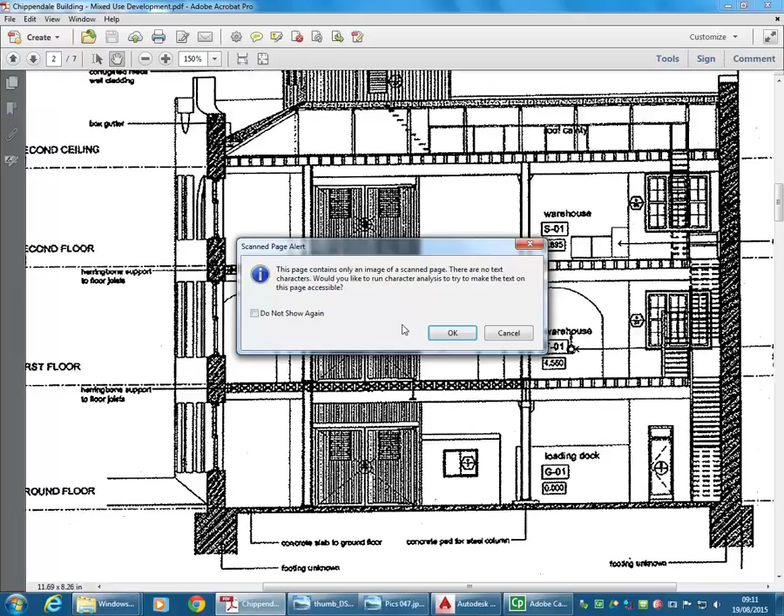Sorry? Yeah, if you want to, yeah. So, yep.

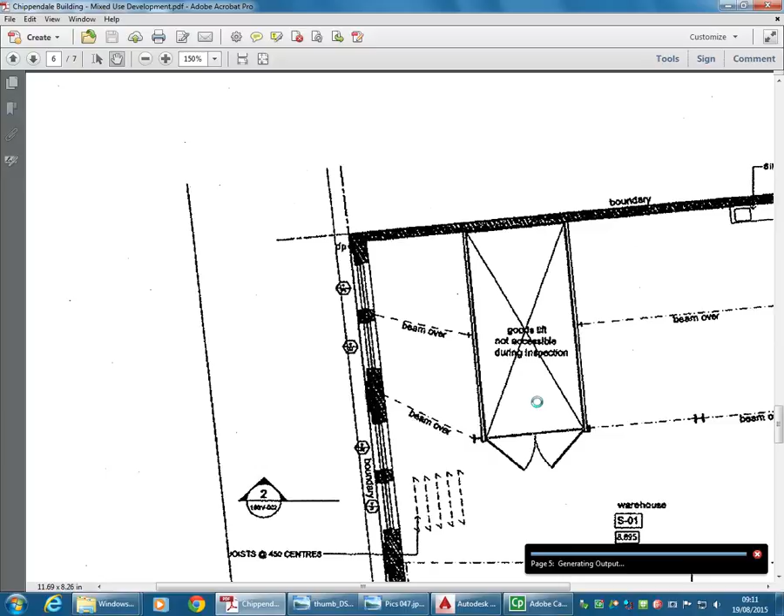Sorry, it's just jumping pages. I shouldn't have clicked OK to that dialog box, but it's just going to make things run faster and hopefully look better. Okay, so just going to rotate that back again. Oh, now it's crashed. Brilliant. Okay.

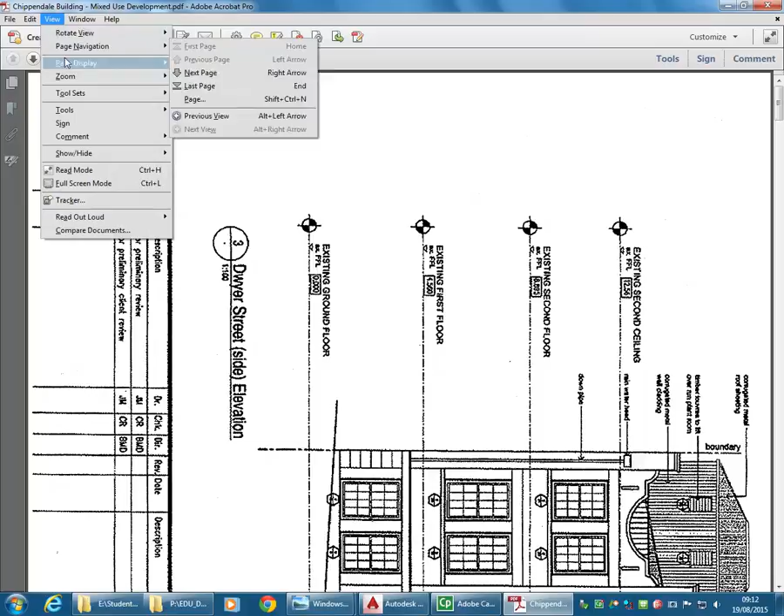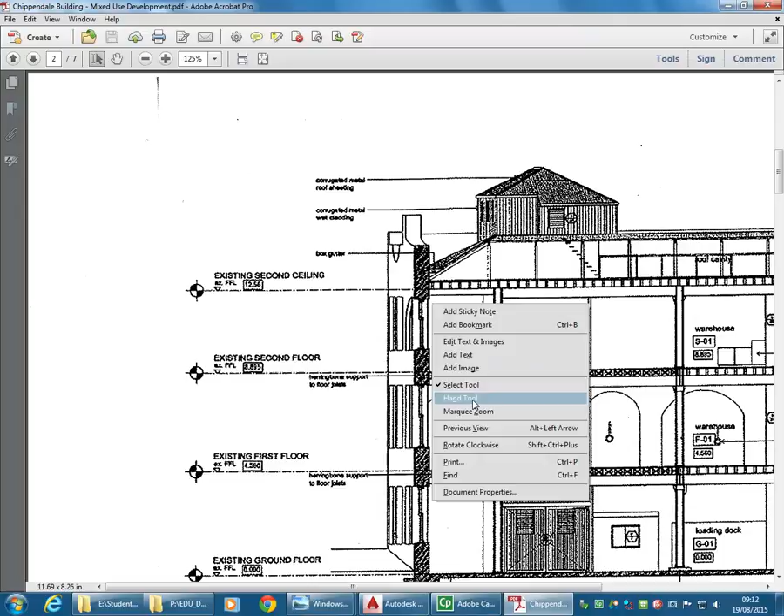Okay, so again, just looking at that section, the other main feature is the columns and the beams. So the columns and the beams support those joists, and so we need to add those elements to the section before really then proceeding to the reflected ceiling plan.

So I might even do the joist in the reflected ceiling plan before maybe completing them on the section, but definitely want to put in the columns and the beams before going too far with those things.

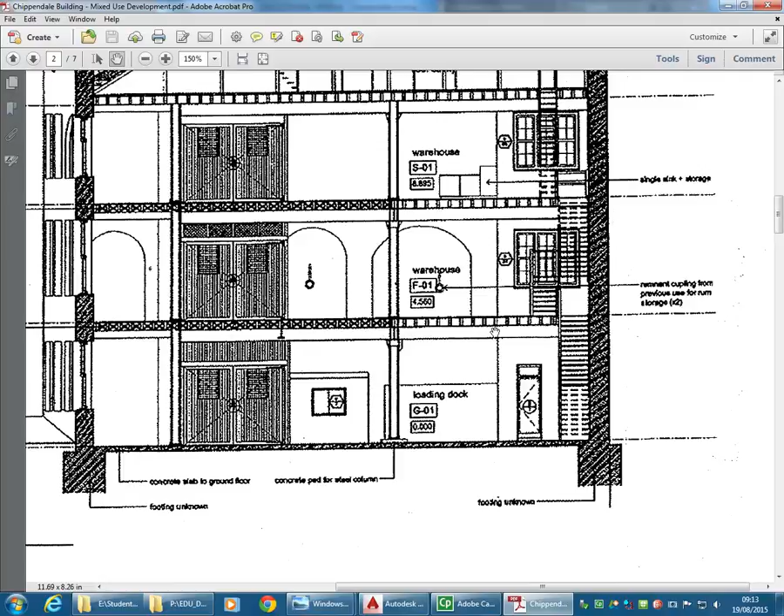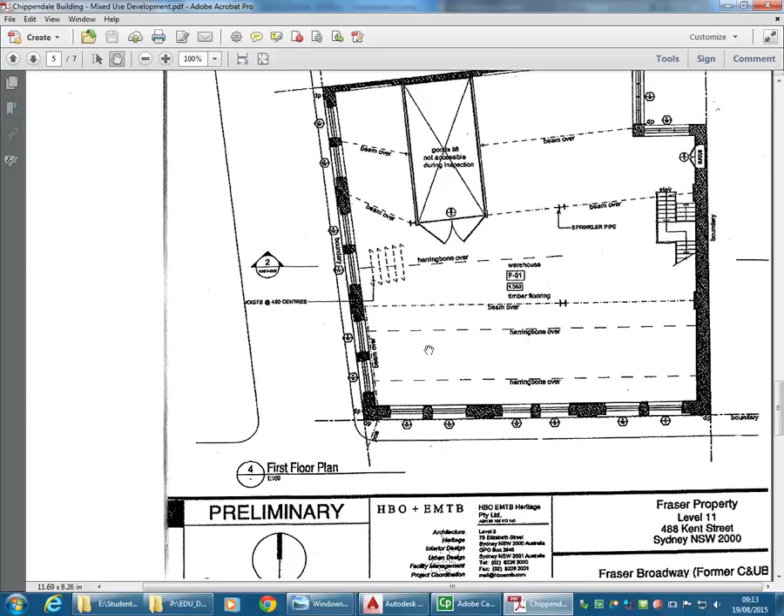And so the joists, I think, are not specified here. So by eye they look like they're about 200 or maybe 250 by 50. I'll just see on one of the other drawings if they're noted. Has anyone seen if there's a note for the joist size on any of the drawings? So it just says joist at 450 centres, but I couldn't see a note on the size anywhere. So again, we can just assume they're 200 by 50, I think.

And then you have the floor lining, so the floorboards above that, and so then working down from the floor level that we're using as a baseline, can assume, well, let's just make it a round number, 20 mil for the floor thickness. So I'm just going to offset 20 mil from that line there.

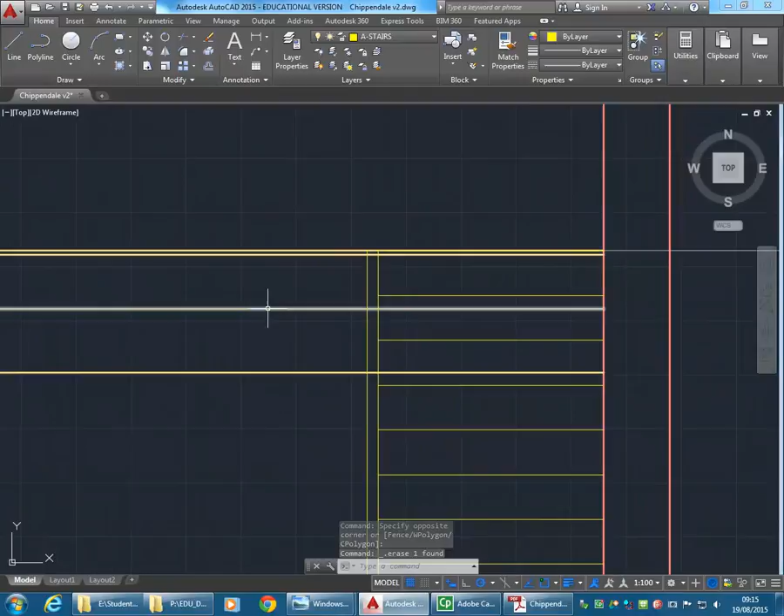And then again offset 200 this time for the floor joists, and we can see there that's really not maybe enough, because that leaves, let's just measure that distance, .345. They're looking more even than that, so maybe let's make it instead 250 joist. So I'll offset another 50 mil from that line. Split the original, so I've got there a gap, and that looks more like the section.

And so then we've got the beams underneath. And so now going back to the floor plan, I'm going to make a layer for the columns when they're, sorry, the beams when they're cut, but actually we'll do that later.

So we've got the structural columns layout, which you can use for the columns in elevation as well. So I'm just going to draw from the columns that we've already got, and actually while I'm at that, can check the orientation. Yeah, I think that's okay. Oops, so we've got it right when we place them.

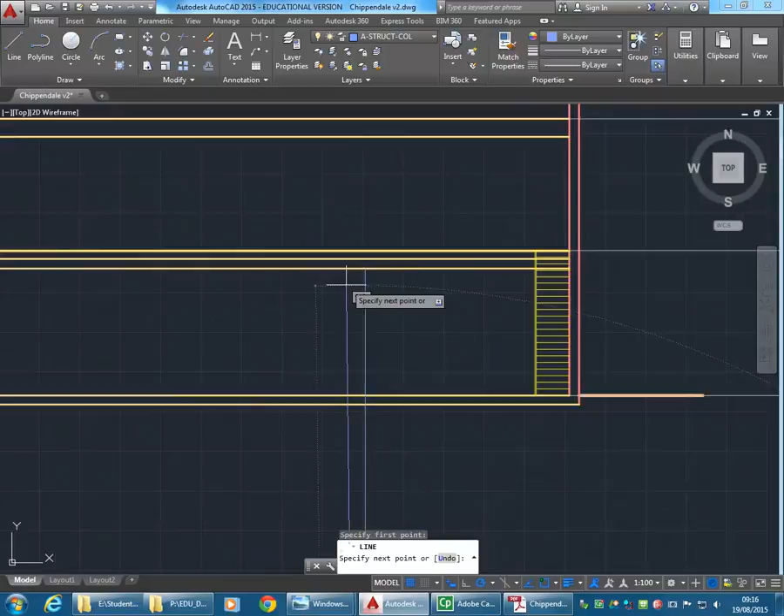And so again, just projecting lines from each edge that you'll see on the column. So you could even go as far as drawing the inner lines. And so notice I'm just making it perpendicular to the bottom edge of the beam for now. It will continue through to the joists. I'll have to look at the connection before working that out properly.

And there may even be another beam that projects across from here that isn't shown in the plan. Yeah, so there is. So we've got a beam here that comes towards us that we'll need to show in section as well, and that can be added to the plan later as well. So again, just copy that line across, so that's drawing it again.

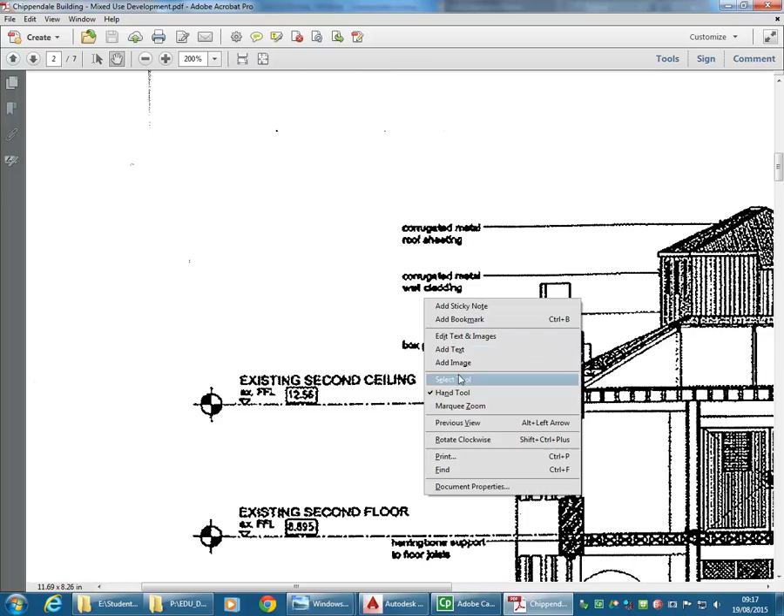Okay, so looking more closely at that drawing and then the photos as well. You can see these are actually different, so it really doesn't need to be perfect as long as you draw some sort of support there. It's not actually bracing is what I was going to say, but I forget the structural terms sometimes. So there are terms for all of these different steel structural elements.

Right, so we can just assume a size for that. So I'm going to say it's maybe 100 by 250 or something. Maybe, yeah. Well, if that's 3, yeah. So maybe 100 by 150 even or something. 150 by 80 maybe, even something like that. We'll see how it looks. So we'll do.

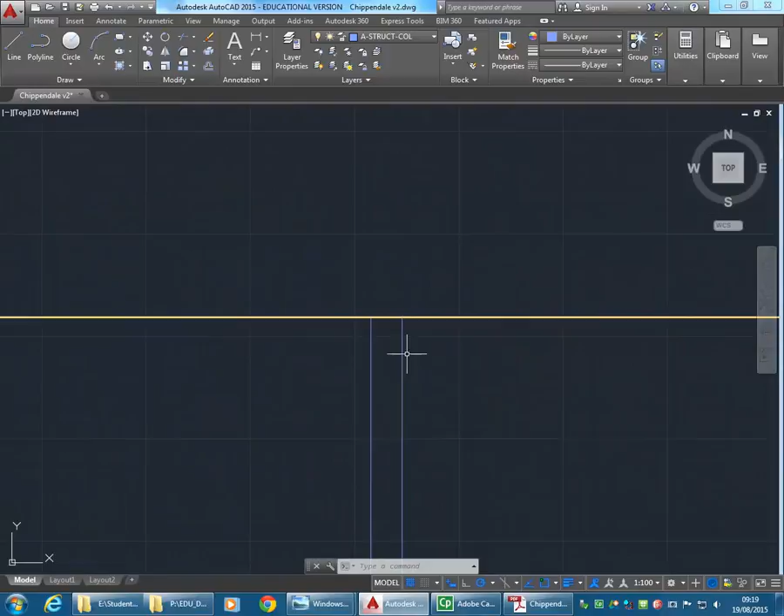Here you can see the thickness of the UB, and I'm just going to keep that. I don't remember what it was, 15 mil. So I'm just going to offset 15 for each of those lines, and then offset 100,

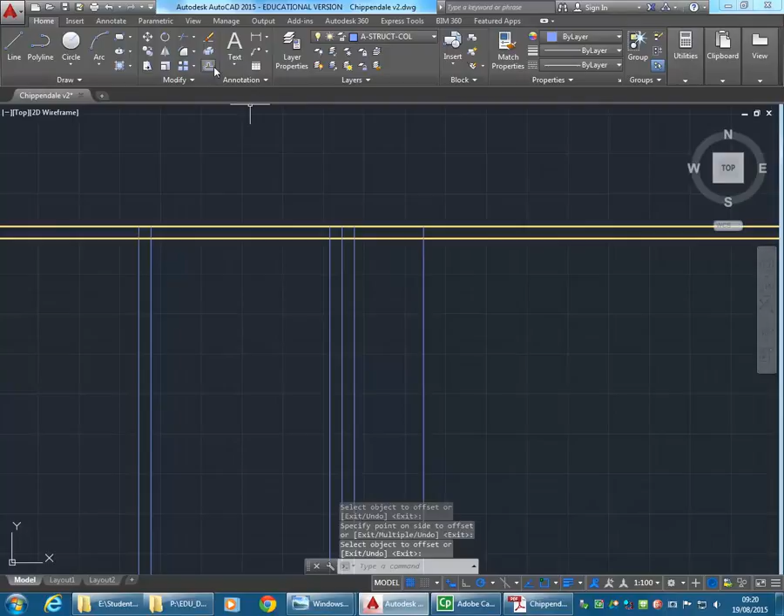and then 200, and then using fillet you can join all those lines together. And then trim.

So all those lines can just go onto the structural columns layer, and then a diagonal would be plenty.

You could, if you really want to, make a block for that little part, but I'm going to make a block for the whole column, and that should be enough, I think.

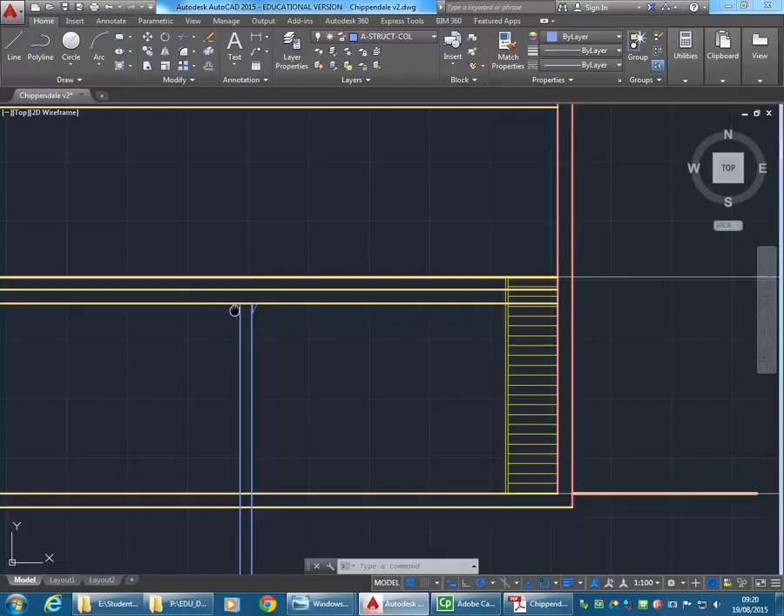So I've got one side drawn, and then the other side would just be the same. A good trick there is to draw a line between the two sides of the column. I'm just using the inner edge there to keep it simple. So I've drawn a line there, which should give me a midpoint in the middle of the column.

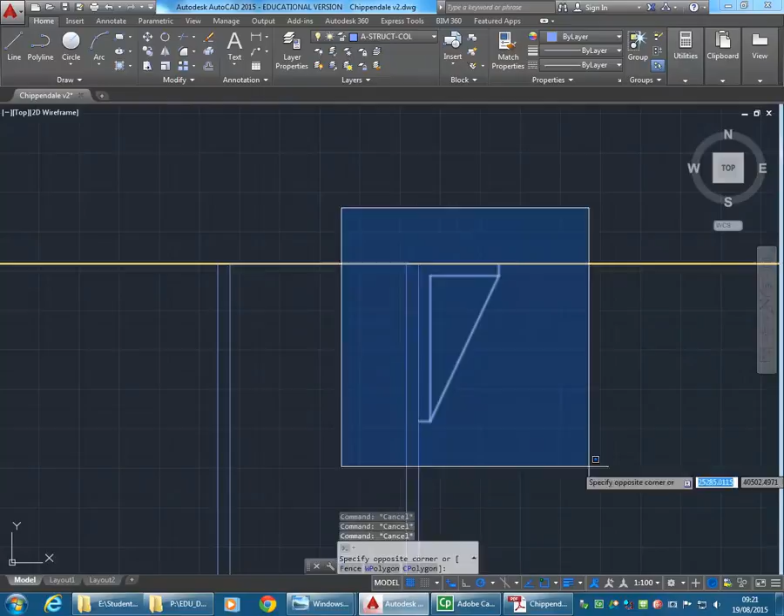Exactly, so I'm just selecting left to right. That's a window selection, which will only select the things inside. And then with mirror, I can snap to the midpoint of that line I've just drawn, take it down and make sure it's a vertical line.

Enter to keep the original. So you're going to make a block for that whole thing so you can just repeat it. Exactly, exactly, yeah.

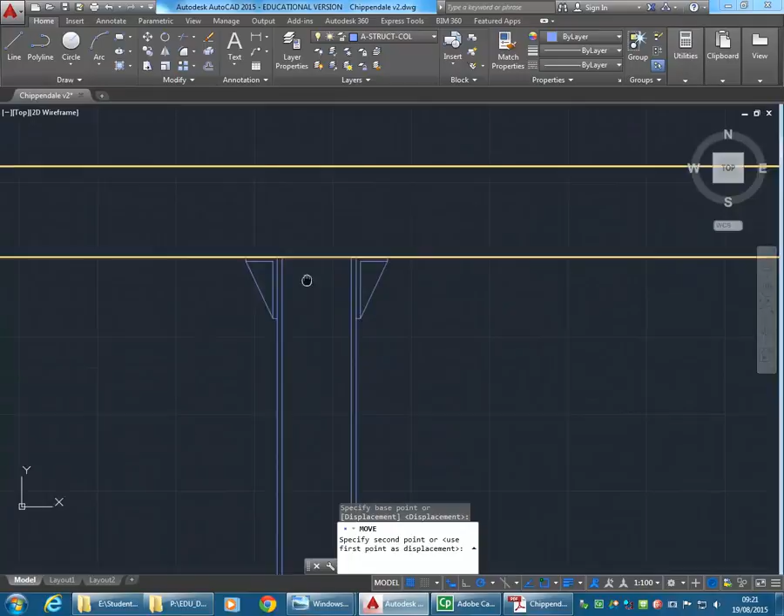So I might move that line down just to remind me that it's there, and it could come in handy when I need to mirror other things, but I'll delete it in the end.

And then, so we've got the plinth, the support of the, or the footing of the column there, which we don't see in that photo, so I'll just finish off with this block piece that is obviously different to the one you can see there.

So we've got just a rectangular piece that sits over the face, and I think even though it does probably project out, we can just say it's flush with the column when drawing it.

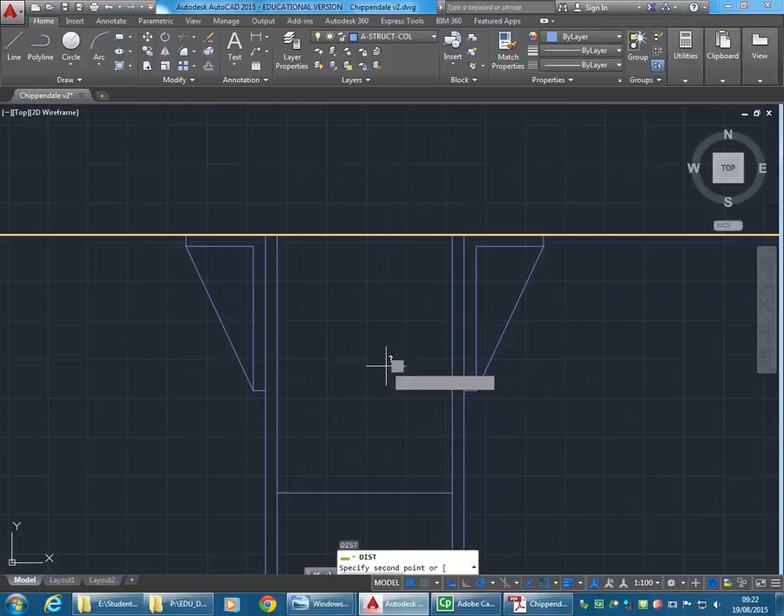I'm just going to measure so I can see roughly what the size is. So yeah, about 160, I think, maybe even 160 or so. So I'm going to offset 160 from the bottom of the beam down, and then what else do we see?

So that's, we're going to see the plate that sits under the beam. So we've got a beam coming towards us that we're going to see, and it's a good chance to draw a UB profile.

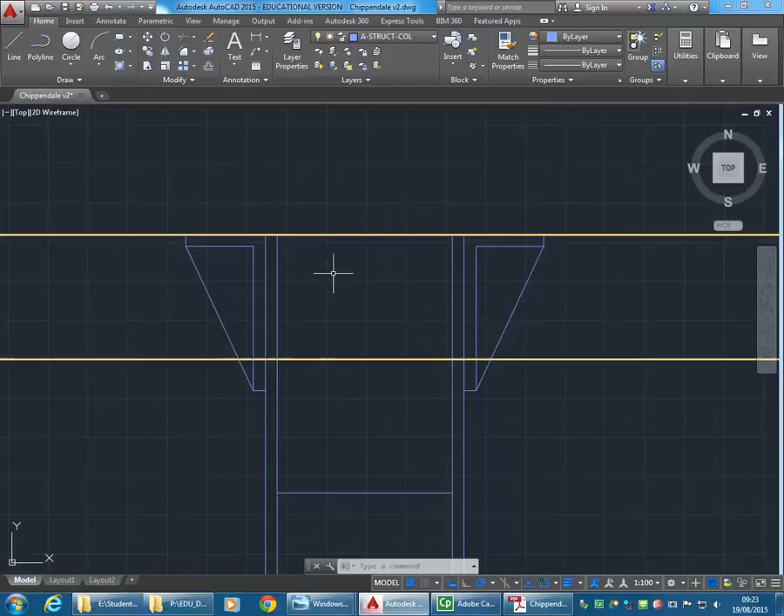UB. So this is a UC. The column is a universal column profile. So I've drawn that in plan.

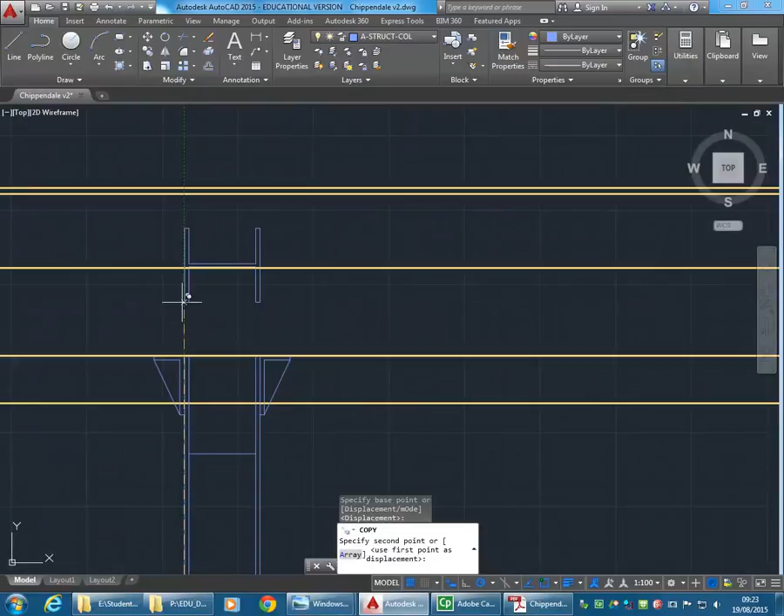Exactly. So I'm going to copy up that profile, since it's the same, just with different dimensions. So I've copied it up so that it's going to sit right above,

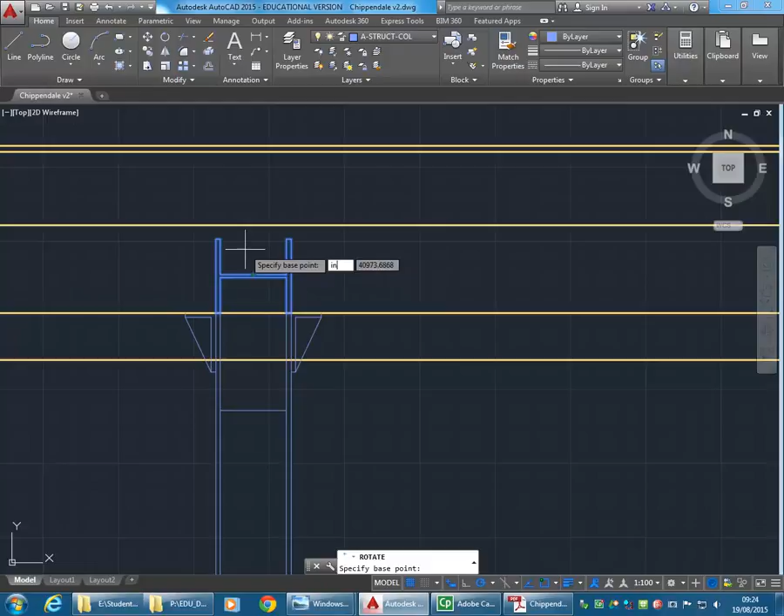and then using rotate, I can snap to the insertion base point. So just moving the cursor around, notice how it's trying to give me the midpoint. It's going to give me the insertion if I move around enough, but a good trick there is to type INS, enter, and then hover over the block, and it'll always snap to the insertion point.

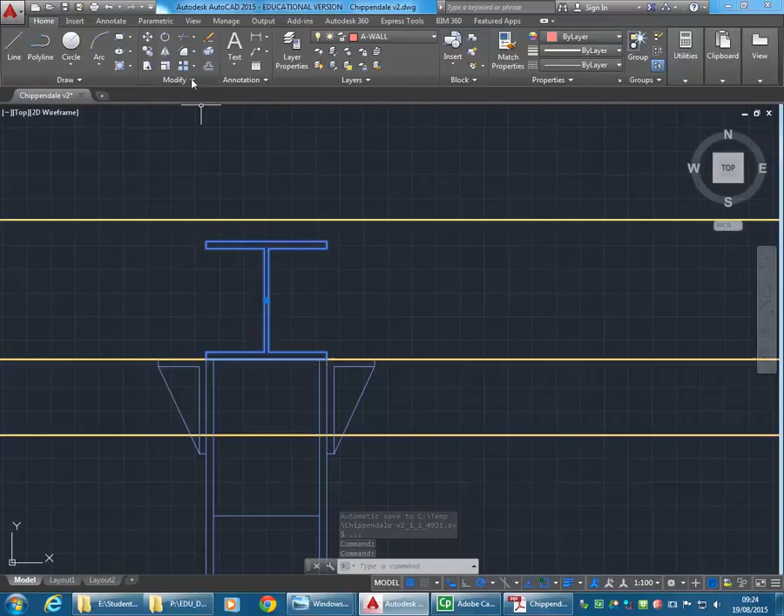And now I'm just going to make sure it's rotated so that it's vertical, and then can explode it. So if I select it, the really important thing to know about blocks is that you can always explode them. So the explode button you have there on the ribbon.

Does that mean just that block? Yeah, just that block, exactly, yeah. And so now if I stretch, this time I'm going to select right to left, which is a crossing window. Enter, and then snap to the top and bring it up to the underside of the,

the joist. But remember, it's also narrower than the column. So good to use a bit of judgment here and decide how much narrower it is.

So, well, that may be wider than I have drawn it, but I'll just check that measurement. So I've drawn it 250 across.

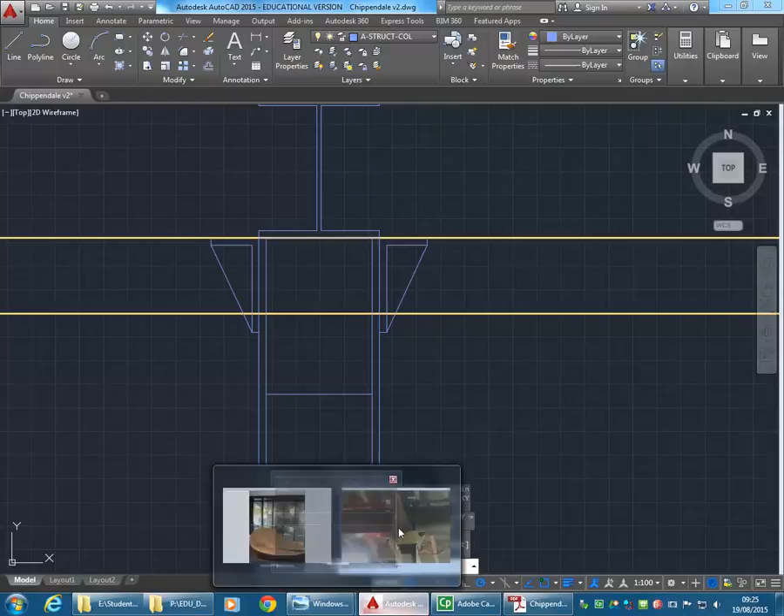So just to get it visually to read as being the same as what you're seeing in the photo there, let's say it is, well, let's say 180, because it would be more than 150, more like 200 probably, but let's say 180.

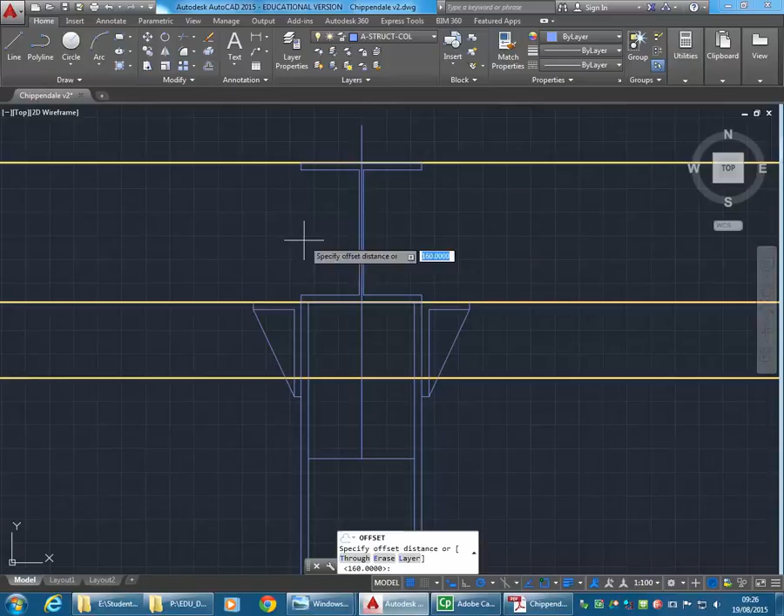Okay, so I've got this line again, which will be useful now. So I'm going to draw a line, snapping to that midpoint again, which gives me again a centre line, which will be really useful, because then I can offset either side of that 90 mil.

So all this should be good practice using a lot of these other editing commands, because I'm going to use stretch again now. Right to left, and I'm selecting the ends of the beam that I want to bring across, but I don't want the column edges to move across. So I'm going to hold down Shift and simply click onto those lines to deselect them.

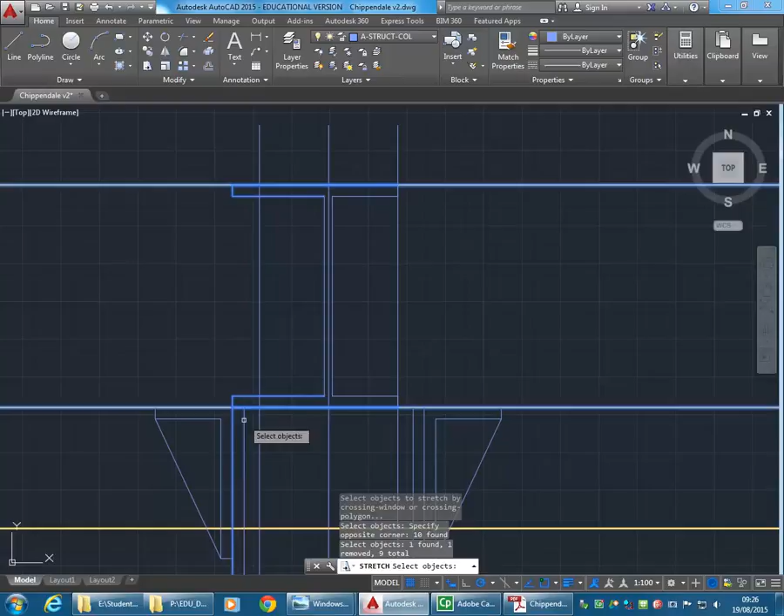Enter, and then I can snap to the corner, bring it across, and then the same on the other side. So always right to left when you're selecting with a stretch command. Has to be a crossing window. And there we go. So now I can delete these lines, and I'm left with the beam the right size.

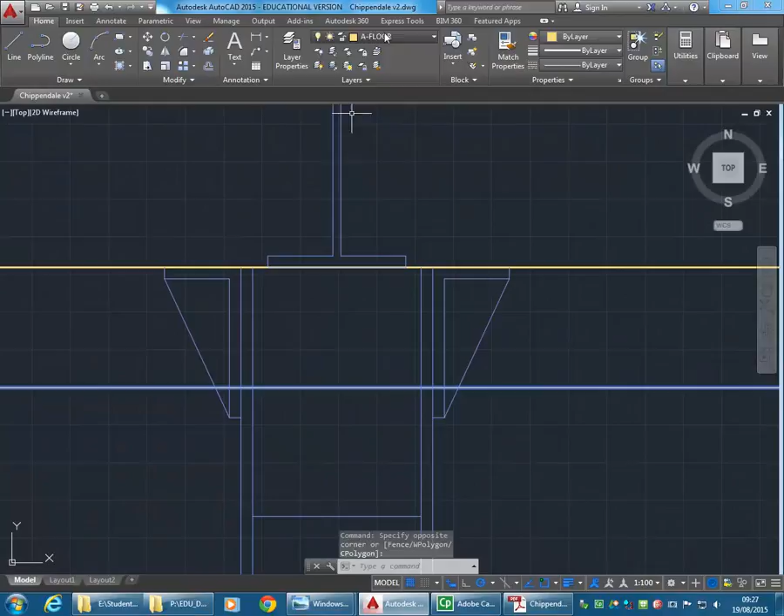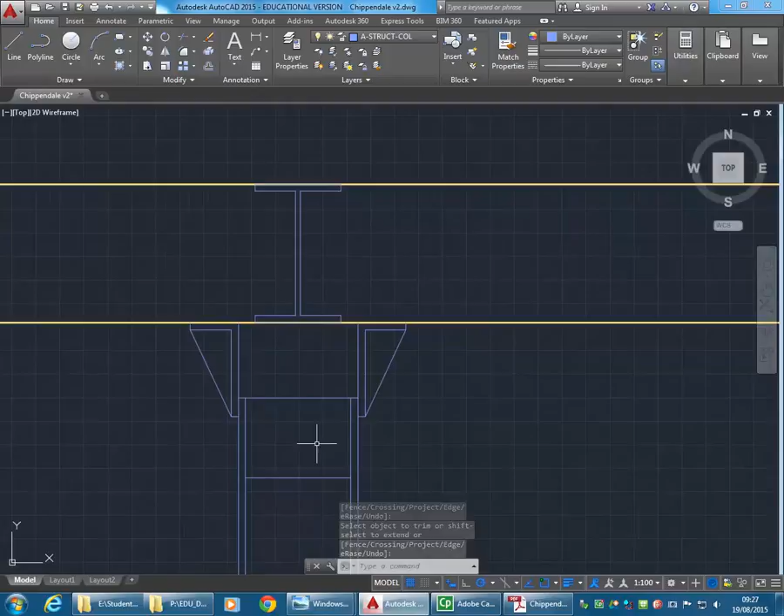And then finishing off that base plate. So we've got this basically rectangular shape, which again I'm just going to have following the edges of the column. So I'll take that onto the column layer and trim, using that line and then the two sides of the column. Just trim all that back. So that's the plate. I don't need this line anymore because I've got this one I can use now.

And then the plate that it sits on is a little wider than the beam. So I'll say that's, we know the beam's 180. And actually while I'm at it, I'll put that beam onto the beam, well sorry, no, I was going to put it onto the beam layer, but we need a new layer for that.

Okay, so this previous beam layer has been used for beam lines in projection, but this will be cut. So when you're labelling your layers, you don't have to always label them as either projection or cut. Usually the one that you make second is the one that you'll label. So here, structural beam cut.

Is my new layer, which needs to have a heavier line weight, and beams and structural elements should read heavier than other things. So 0.35 or even 0.4. 0.4 is going to be fairly heavy to look at, so I might make it 0.35 for now. We can always make it a bit heavier later. At least 0.35.

And then just to keep the colours as consistent with the other structural elements, I might just keep the same colour.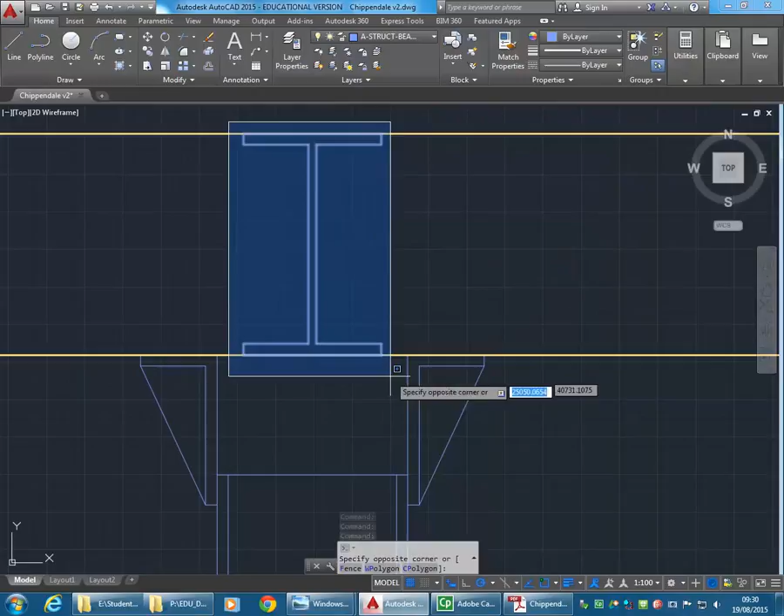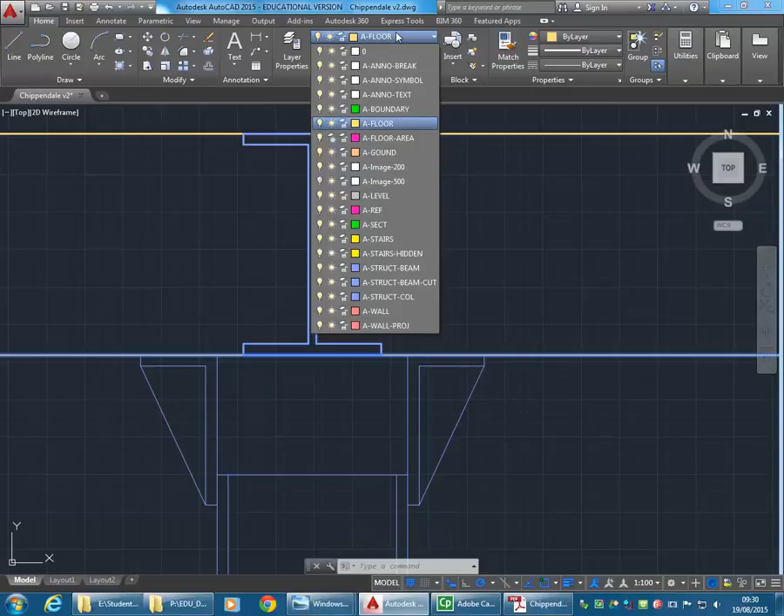So now I can put the beam onto the new beam layer, and notice how straight away it reads as heavier because I have my line weights turned on the screen. Notice as well that this line is heavy as well because it's on the floor layer, and so we'll need to have a joist layer for that. And that could be either part of the structural category or the floor, but I think I'll just keep it as part of the structure.

So joists, and well, we're going to have joists cut and in projection, so may as well do both at the same time. So the cut, I'll leave at 0.35, and then the other one just at maybe 0.25 for now.

And if you're wondering why I'm just debating a bit about the line weights to use, it's because they do vary depending on your scale. There's no fixed setting for line weights, because at scales like 1 to 5, 1 to 10, you'll have overall much heavier line weights than at say 1 to 200. So you've got to use your judgment. But just follow the basic principle of light, medium and heavy and decide that way. So this is medium essentially.

And so then the colours, generally timber is yellow, and that's if there is any standard I follow with the colours, it is based on the material colours that are in the Australian standard. So yellowish colour is always good for timber, well I think anyway.

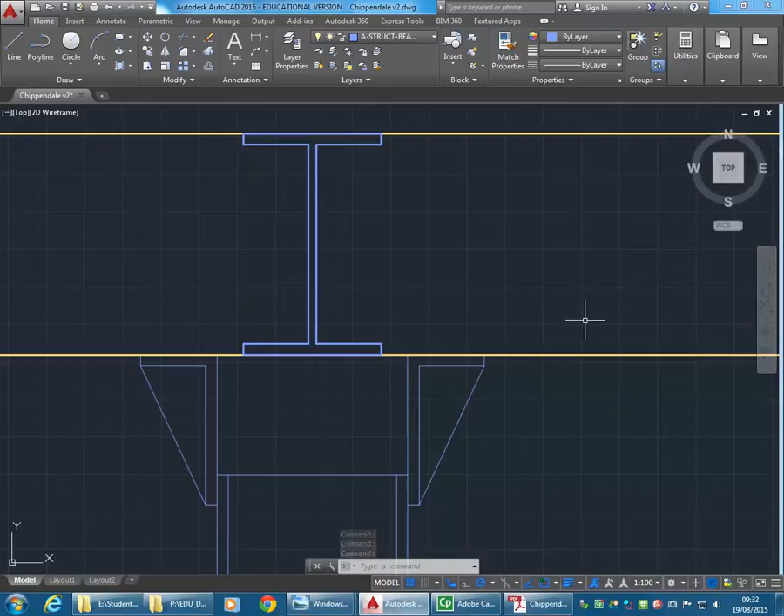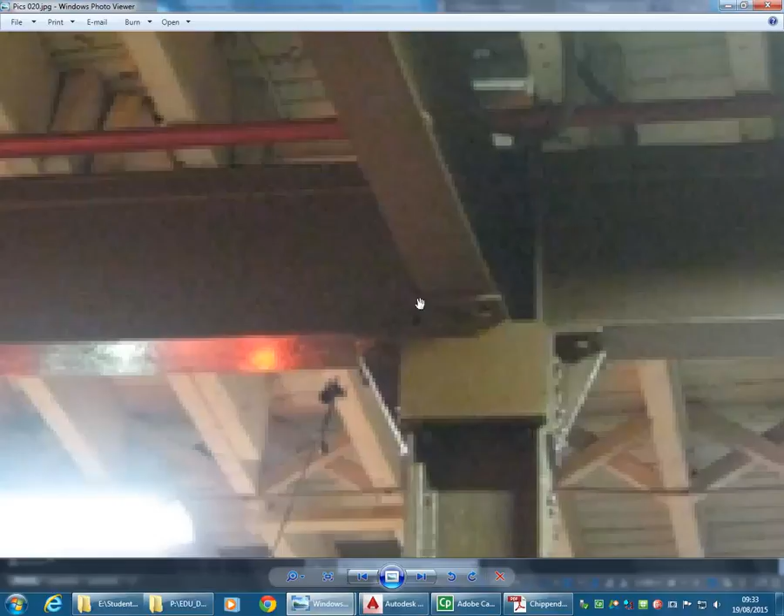So then this can go onto the joist layer, and it's got a light line weight again, which is what we want. Then again, the plate underneath the beam is the final thing there. You can barely see it, but it is drawn there, and definitely in the photo you can see it. So I'll say it's 15mm plate and 200mm wide.

So I'll set it to 15. And then again, to get this, we can just offset from the beam because we know the beam's 180. So if we come out 10mm either end, and all of that could just be on the beams layer. I'm just stretching these lines manually, or I could even use move.

So I know it might seem like a lot of detail to draw in, but when you do your details, you need to do some details for the later projects. You'll have it all set up for you, ready to go.

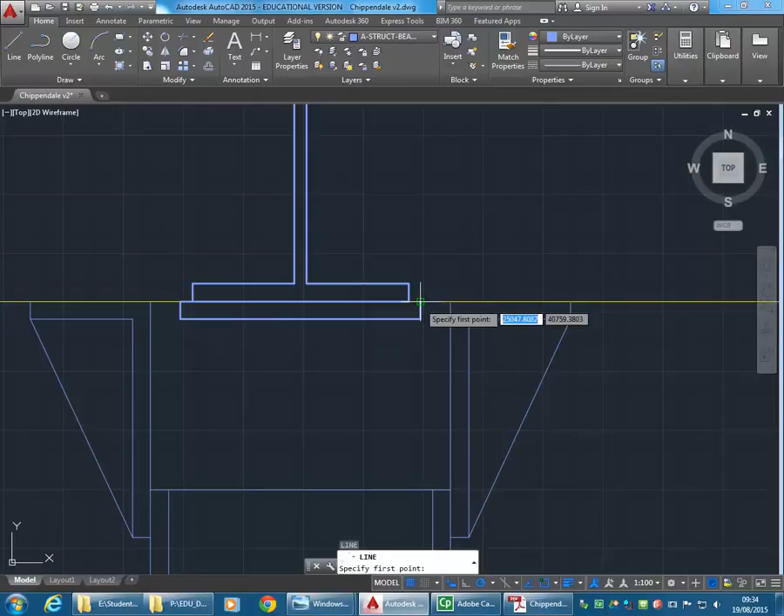So that's it - oh no, sorry, that shouldn't be cut either. So that can go onto the projection layer. So there we are, and then we've got the bottom.

Okay, so you can see you've got these concrete footings which project from the floor. Again, got to use a bit of judgment there to work out the height, but we'll say 150, I think. So it wouldn't hurt to draw that in plan first, just to get a baseline for the size.

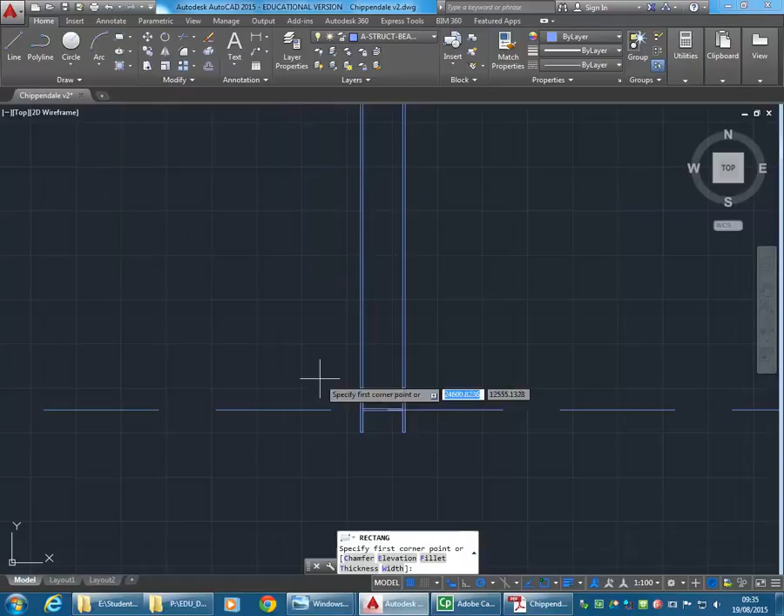I'll show you a trick here. With the rectangle tool, it's difficult to draw from the centre, so you can always just draw it from the corner or even draw it out in space. I'm just going to decide on a size - what do you think it is? We know the column's... oh no, sorry, it's not, it's more than that, I've forgotten what it is. So 250, yeah, you're right. So it's 250 across, and that looks like it's about 3 times the size, so we could say 750 by 350.

So if it's square, yeah, maybe that's right. I'll just draw the rectangle off to the side. So 750 across, comma 350 vertically.

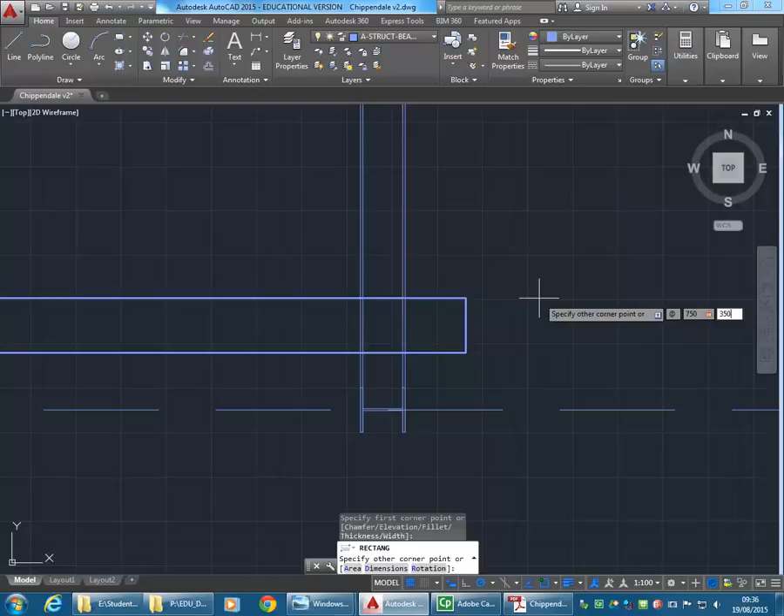And we don't have a layer for concrete either, so that's another one to make. So, structural concrete, and yeah, we can make a new one for the cut. So concrete - the colour for concrete? Green, yeah, yeah. Okay, that's just the Australian standard colour.

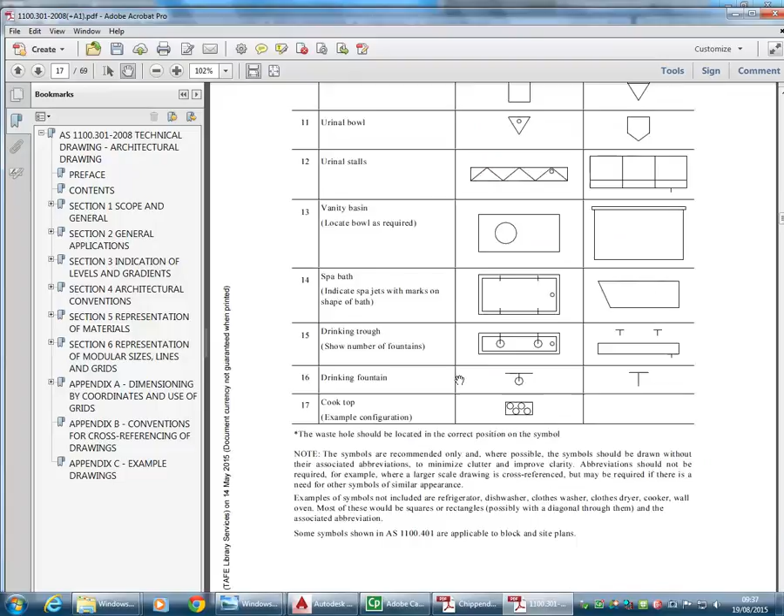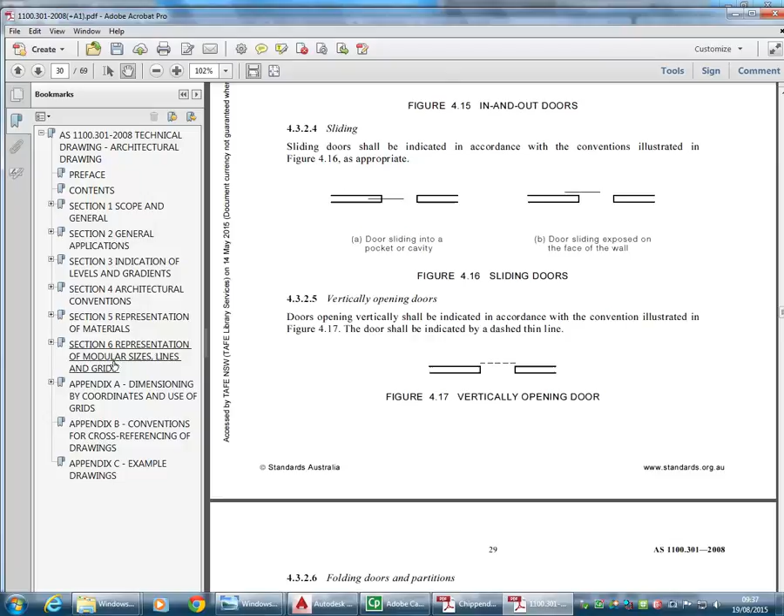So, oh yeah, while we're at it, I'll show you there in the Australian standards. I think I've given you the architectural one - I'll double check, I forget these sometimes, there are a few to remember. Here we are, so, oh no, that's not it. Yeah, yeah, and, here we go - representation of materials, there we are.

So concrete, here we go - any of those greens. Structural concrete, so it doesn't have to be standard green. Down the bottom, if you've got standard colours in AutoCAD, it can be any of these other greens, it's up to you really. And again, it's in projection, so not a heavy line weight, definitely - either medium or light, but again, because it's structural, I'll keep it as medium. And just move it onto that layer.

Okay, so now's the trick to snap this so that it's centred on the beam. A really good trick you can use in AutoCAD is to use the move command. I've just selected it and now I'm going to click move. Notice I've just hovered over the midpoint on the top and then the midpoint on the side. Because I have object snap tracking turned on - if you're not sure where that is, it's down the bottom, it should be turned on by default these days. So you need object snap to be on.

And then you'll see next to that - oh, they've hidden the option. It's one of the - oh no, so it is there. Why can't I see the button?

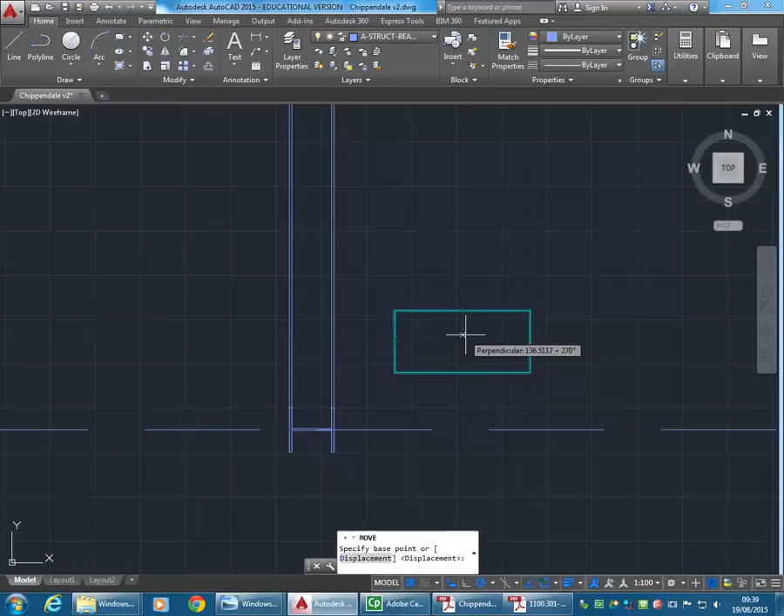And that gives you those little blips. So notice how, because I hovered over those midpoints, the blips are still there to tell me which point it's tracking, and I can then line up the centre by aligning those two tracking lines. That's really the only way you can snap to the centre of something like a rectangle which doesn't have a point to snap to.

And then again here to snap to the centre of the column, because it's a block, INS, enter, I can snap that way. So that's a useful thing to have in plan, and you can probably assume the other columns have the same thing, and you could just copy it to each of those. But I'll do that afterwards.

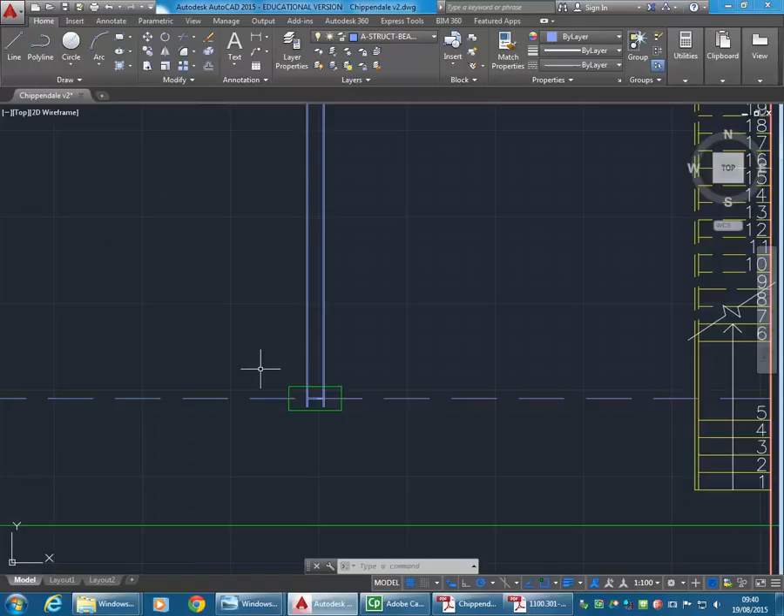So if you were doing the fit-out or... Yep. Yeah, exactly. Just above. Yes.

So what you should, with columns of that size, you should always assume that they've got some kind of concrete. Not always, no, they'll always have a footing, but it might not be raised from the main floor. So normally when people talk about a floor, they mean the structural floor, and then you have floors that are just finishes above that sometimes.

So that's one option, to add a new finished floor that's raised. And you'd need to put a new floor structure in to support that as well, so you just have floor joists or battens that would raise it up. And if you're going to do a timber floor, that's one way.

But another option is to just leave it and seal the concrete, which is a pretty reasonable finish, and leave the projections and work around them, which these days is fairly common with the more industrial sort of fit-outs you see a lot. It would be, but people can get around it as well, as long as you just plan the rest of the design around it.

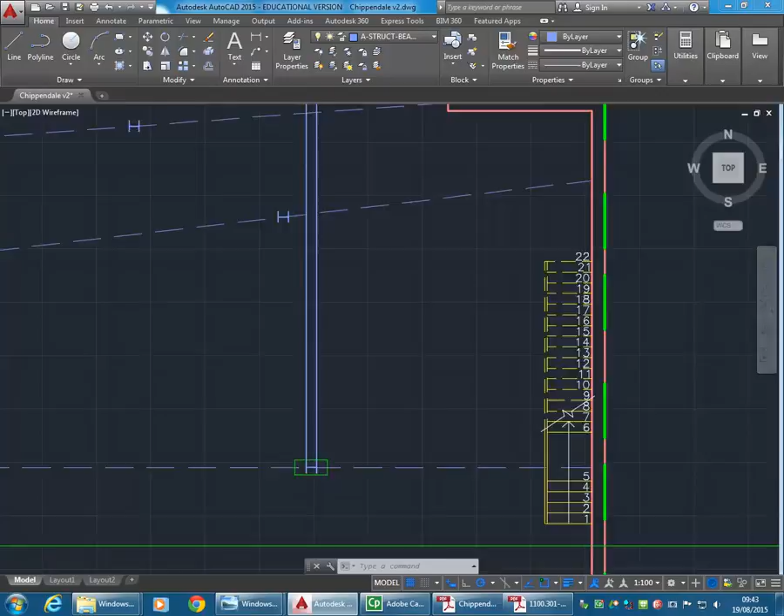So there are ways of faking it, but it's not even worth doing those. And is that concrete just holding it there? Is it just like sticking it in place? This is obviously not the right terminology, or is that involved in there?

And oh yeah, that is part of the structure. Yeah, that's the footing for the column. So yeah, you can't change that at all.

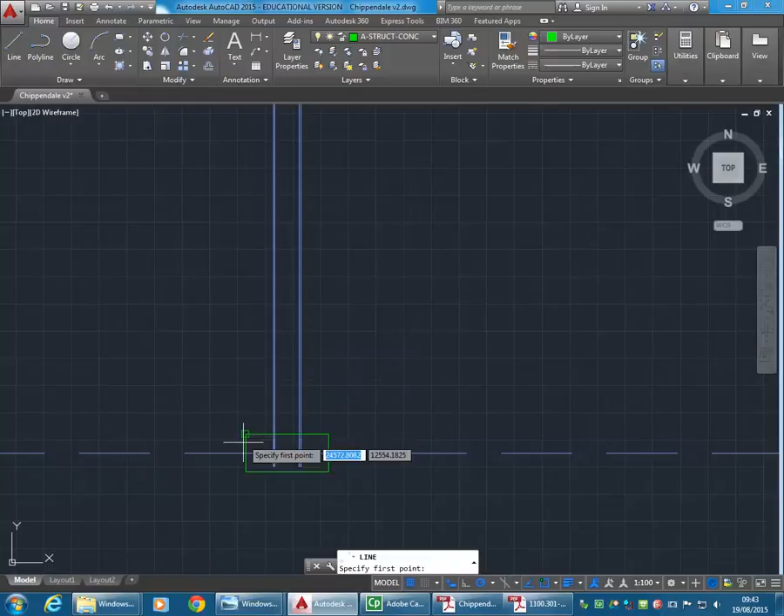So again, I can just draw lines from this up to the section and offset, so I say 150 from the floor slab, and now that I've got that, well, I don't have a concrete cut layer, so I should do that too.

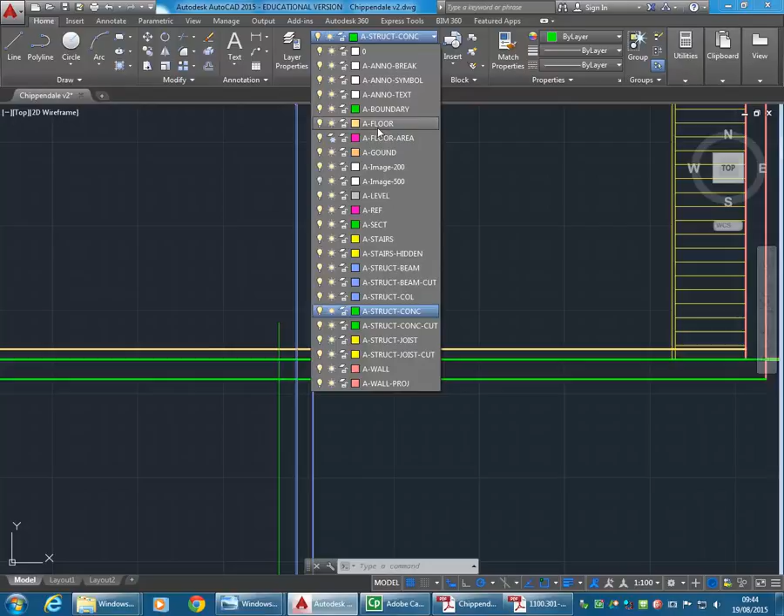And this can all go onto that layer because the floor is concrete, so it should go onto that layer. And so the layer that I made before and called simply floor will become the floorboards in the end. So now, though, with fillet, just join those together, get this onto the same layer.

Trim, and I may as well trim the columns now that I know where it finishes, and then that line I can use mirror to flip using the centre line of the column.

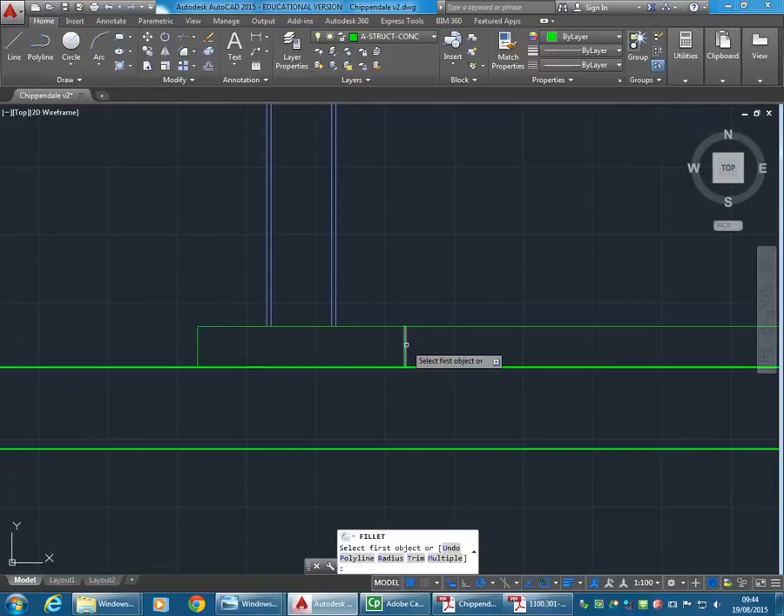So there we are, nice beam, column I mean, with the beam. So the beam should be made into a block on its own. Don't be afraid to make blocks, it's so easy. Once you select the objects and type B, enter, and you just got to force yourself to remember to pick a base point every time.

In this case it would make sense to have the top or the bottom as your base point instead of the centre, so you could just snap to the midpoint. I think the base would be as good as anything, and convert to block so it doesn't remove the one that's already in the right place. Don't turn this option off, it's terrible when you can't explode blocks.

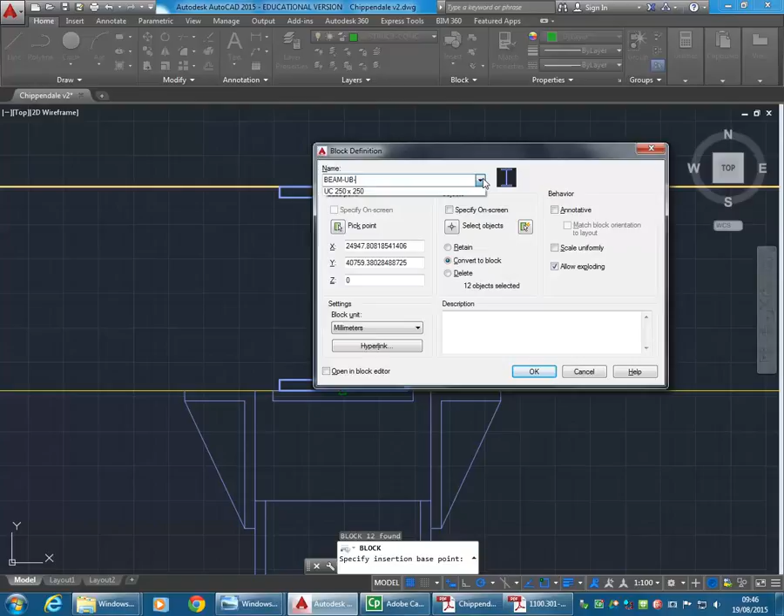That's it, so okay, and a name so it reminds you, so we'll call this beam, maybe UB. What do they call the other one? We'll just call it UB, because UB means universal beam. And then the size—I've forgotten completely, 180 across, and then, yeah, we'll say 180 by 300. Just trying to follow the same convention as the other one.

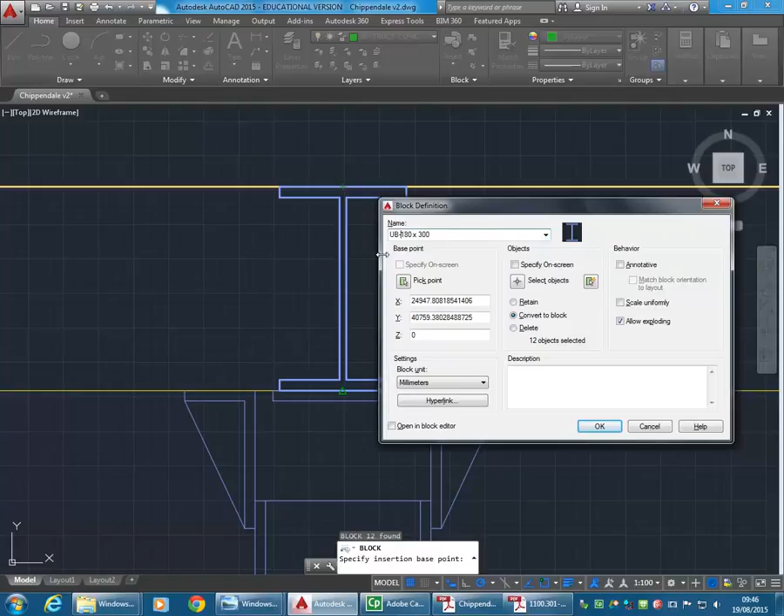So it's actually 295, but close enough to 300. That's fine.

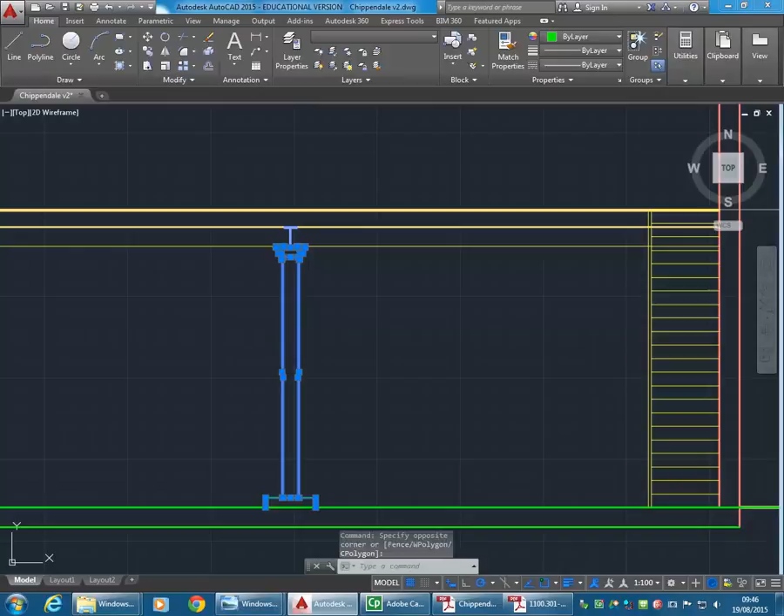And then another one for the column. So again, just selecting that and making sure I don't have anything else. And again, so B, enter, and so it's UC. Might as well put the size in.

Well, you could, but we've got the upper levels, they're going to be different. So the column size—here we go, 250, and this is an elevation.

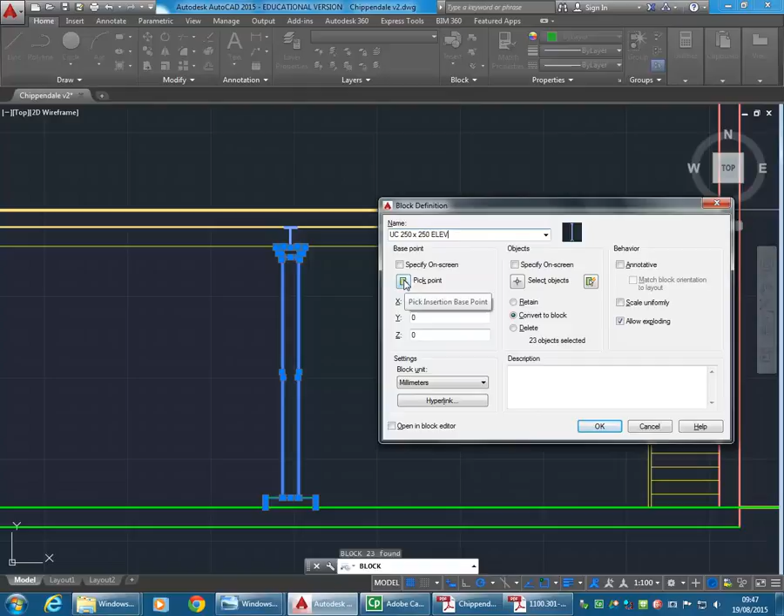And again, always remember to give a base point. So here maybe the midpoint on the plan. So again, I'm just using object tracking to snap that to the floor line. Convert to block, of course.

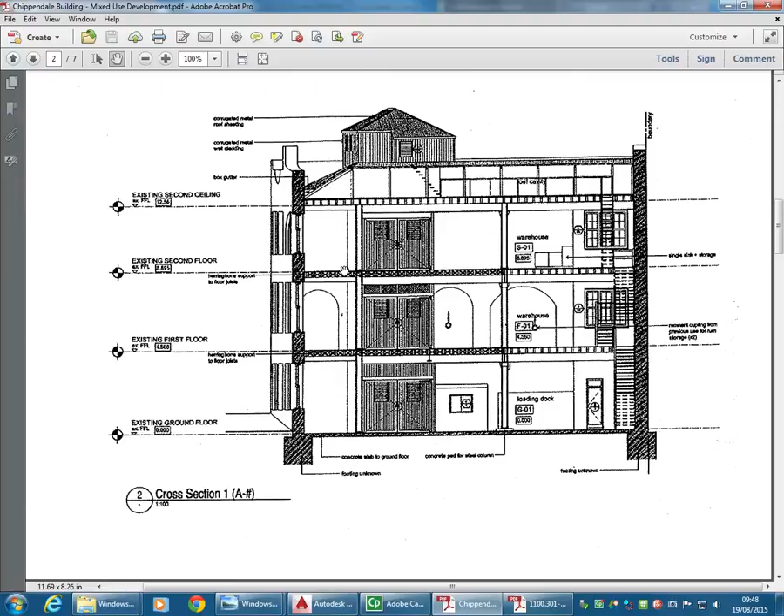So if we see these other beams, has John told you whether you need to keep any walls? Yeah, yeah. Basically, if you muck around or remove anything, be aware that you'll need to replace the structure. Yeah, so that sure, it is, yeah. That's good.

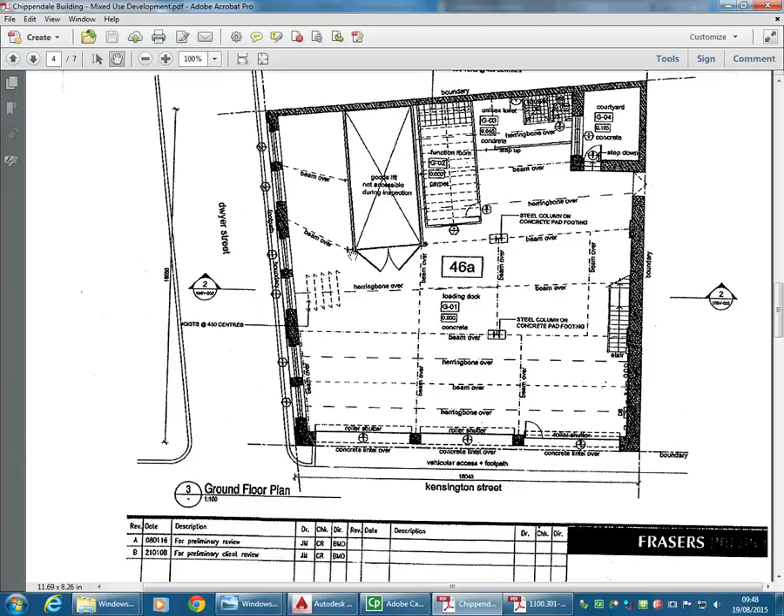So that's pretty standard, and we'll just assume that it's all been vacated and the walls have all been removed, but the structure's still there. So you should be able to see all of the columns in the section.

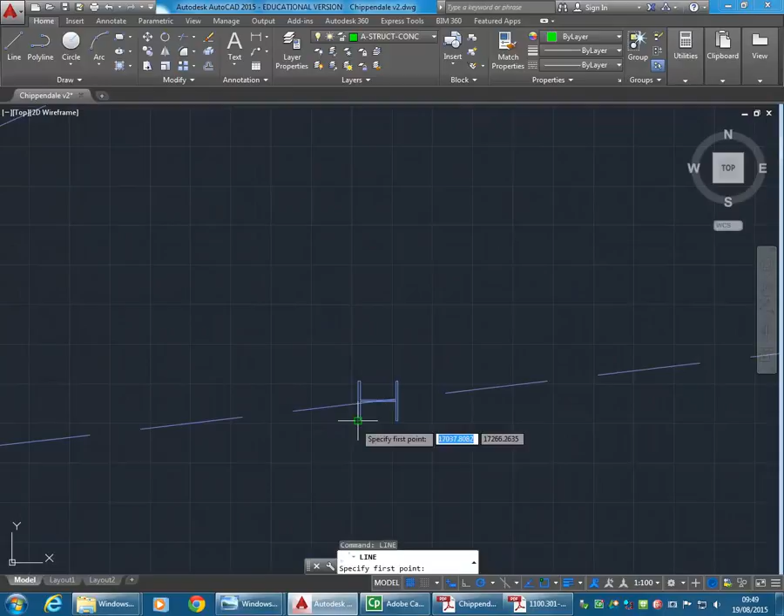And so now with those blocks, we can simply draw lines from the columns on the lower level, and I'm just projecting these from the left-hand corner. I could have just copied the line after drawing the first one, but it's really not that much more difficult to just draw each one.

So it doesn't matter how high these are, they're all going to be deleted afterwards. I'm just going to select both of those blocks now, click copy, and then snap from the base of the column on the left-hand side, and then coming across perpendicular to each one.

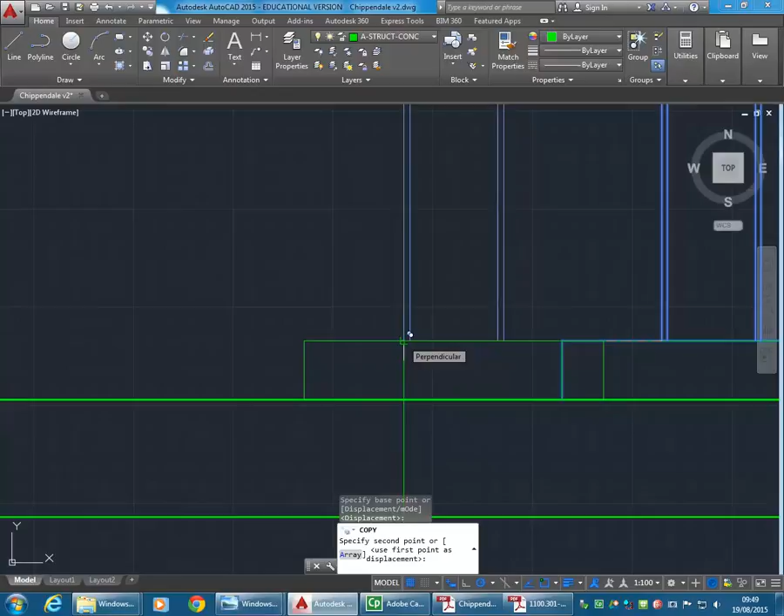And so we'll need to maybe explode some of these. That's fine. Okay, so where they're overlapping, you could make a new block if you really want to, but it's probably easier just to explode the ones that need to change. So got to think a little bit about what's in front of what.

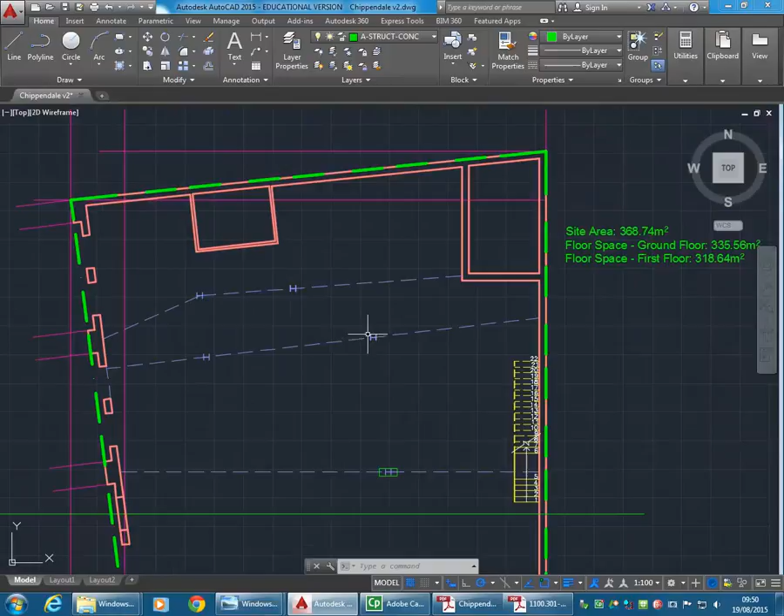So this one is in front, and then the next one to the right is behind. So this one's hiding the one behind, so I'm going to explode the one behind. And then remove this line, that's really all we need to do there.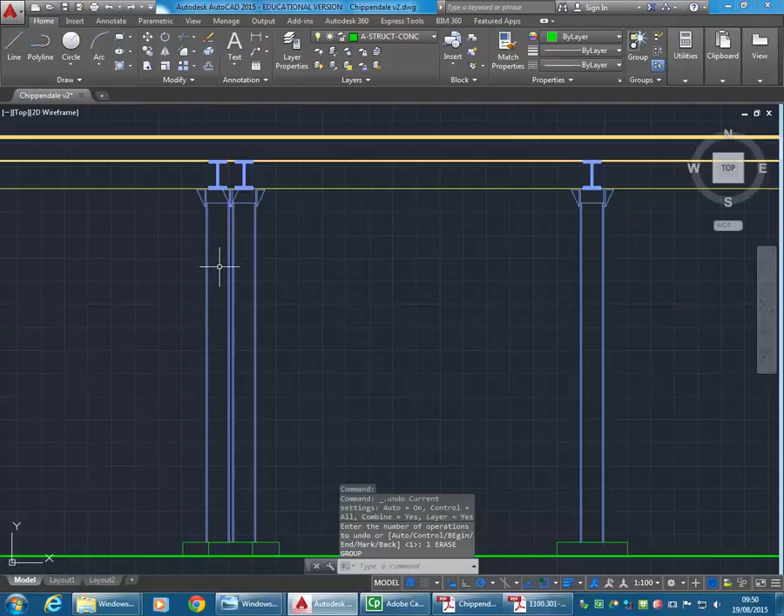The top's okay. And then with these two, it's the one on the right that is in front, so it's hiding the one behind. So again, selecting the one behind, we'll explode that—not erase, oops—so explode, and then again just remove the lines that aren't going to be seen.

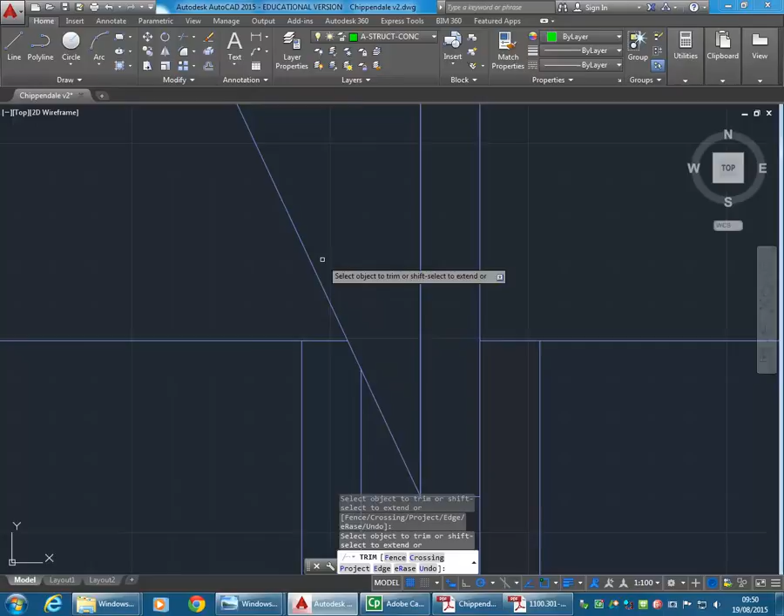So with trim... Yeah. It's a really good exercise in drafting though, once you see things at this level. Mine's free, but yeah.

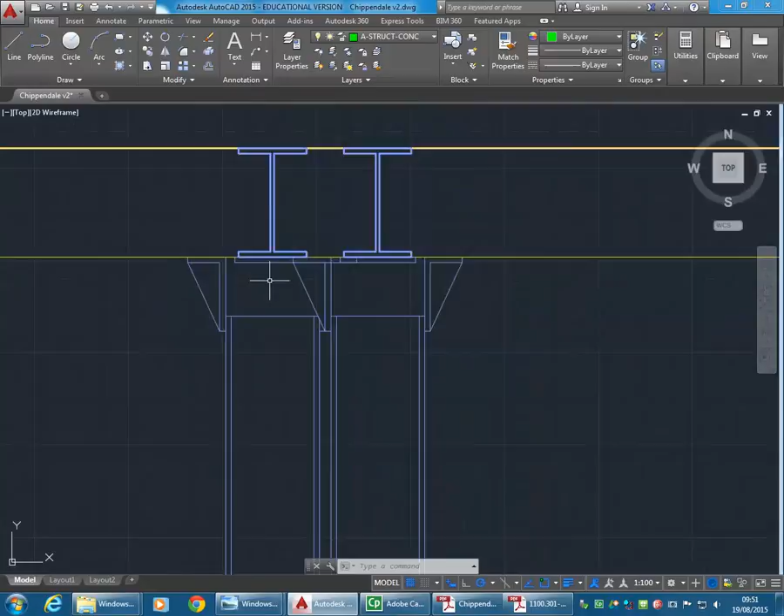So maybe I'll just make a start on the joists, and I'll give you some time to work on this. Or actually, no, maybe I'll let you work on it, and then I'll do the joists afterwards. Might be too much otherwise.